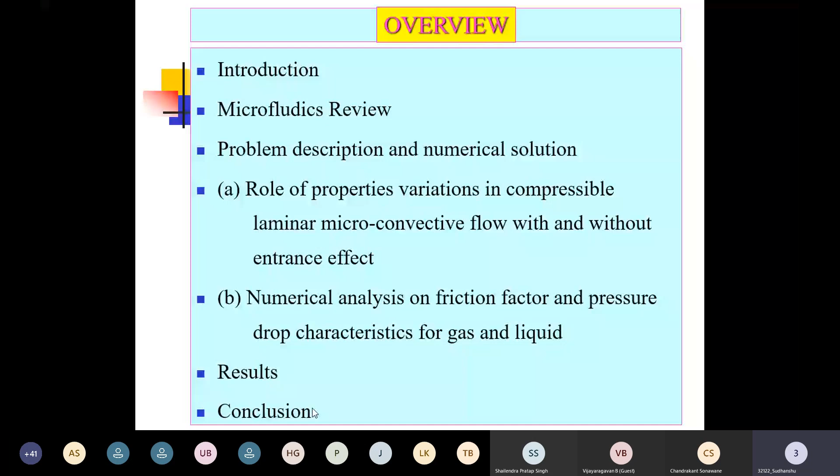And in a complex flow engineering system, when we study the gas turbine, the turbine generator, before designing the shape, size, volume, material, and all the effects of the fluid parameters like conductivity, density, the temperature field, velocity field, you can find them well in advance before you fabricate anything. This is the beauty of CFD software.

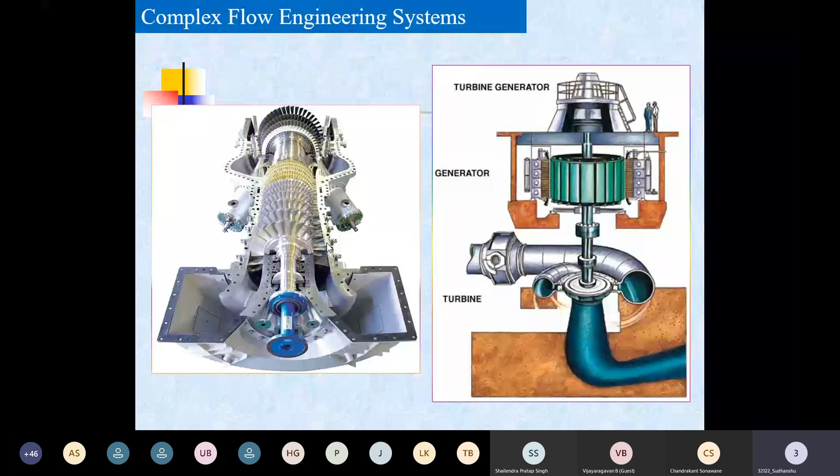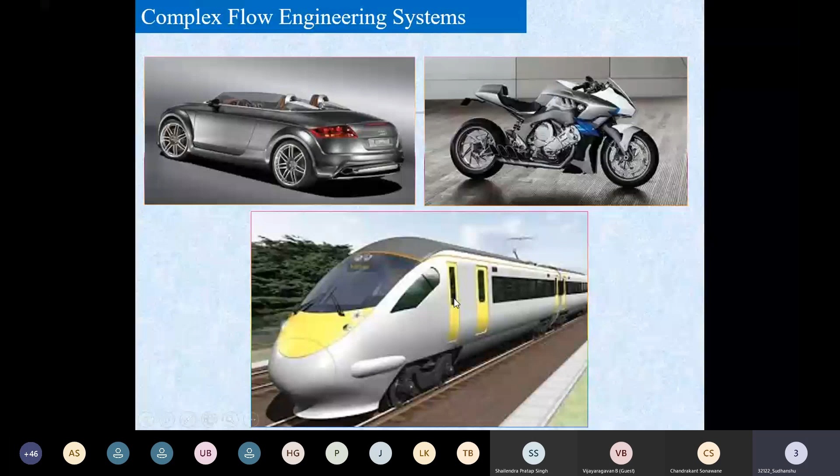So complex flow engineering problems are designing the shape, maybe of a bike, maybe of the bullet train, maybe of this type of vehicle. You can use this type of CFD solution when you go for the complex flow engineering system.

When you construct a bridge, what is the distance between these two pillars, and what should be the height so that the wave energy does not hit this pillar at large, and the boats and ships can go easily without obstructing the current? That also can be seen with the help of this CFD solution. The same is true for the gas turbine and the wind power tower. Such complex flow engineering systems you can handle with the help of this CFD tool.

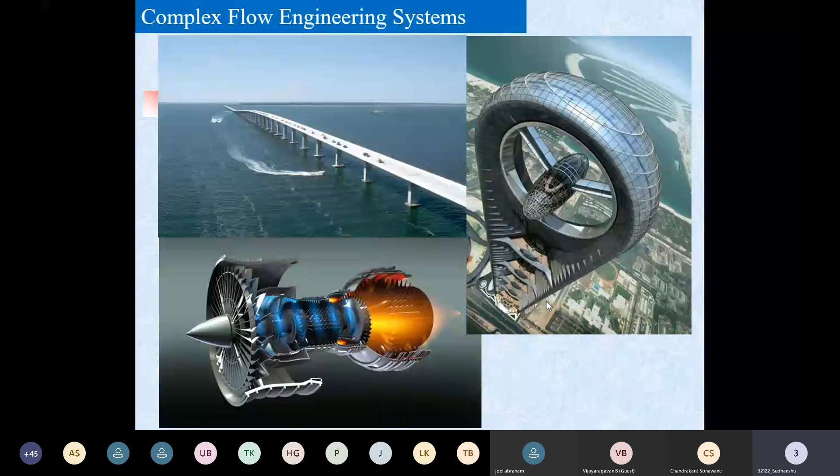So the best example we will see in aerospace. Very first, I will go through the application point of view. I will focus on biomedical applications, aerospace applications, material technology, MEMS technology, electronics applications. After describing all these applications in 5 to 10 minutes, I will specifically focus on the electronics and MEMS device applications where this research area is applicable, how these MEMS devices can be designed, and how microfluidics can be studied. Then we will go in depth.

So let me highlight various applications of CFD. I start with the first application, called aerospace. You can see here when it flies at a very high altitude, it has a drag force. The propulsion takes place with the help of engines located at the ends of the two wings. We have gravity because of the weight of this system and the passengers sitting inside. And of course, the lift is generated with the help of the wing shape, the aerofoil blades.

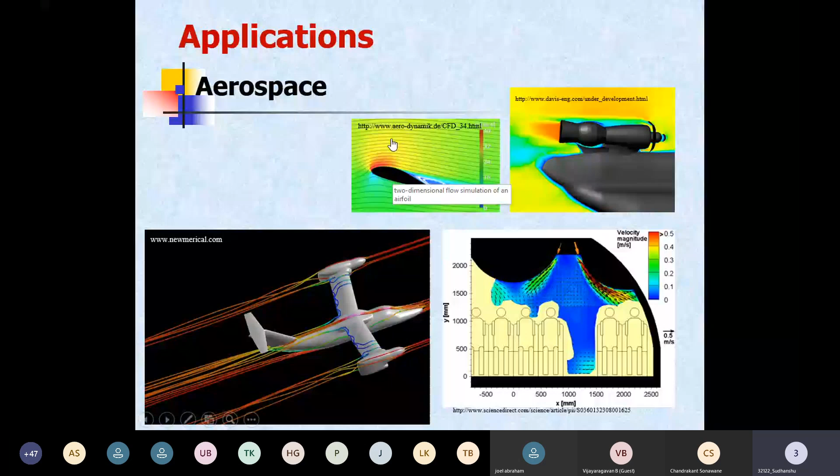So this propulsion study can be done. This aerofoil shape, how the attack angle is designed, can be well studied. And basically, if you see the structure, there are four types of aerodynamic forces. First is thrust, which is the power of the airplane engine, acting in the forward direction.

Second is the drag force. It is the resistance of the air molecules that hit the airplane, and it is a backward force. These two forces are opposite to each other: this opposes and this propels. So of course thrust should be higher than drag. The third force is lift, which is an upward force, and the fourth is weight due to gravity, which acts in the downward direction.

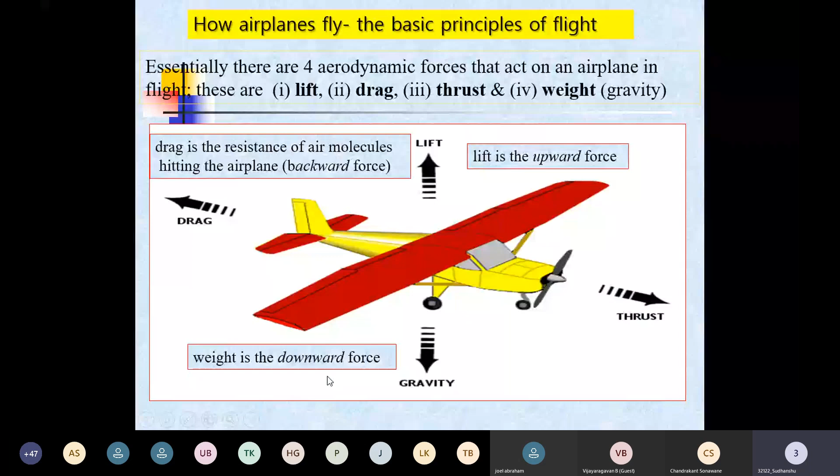So thrust is generated by the airplane engine, propeller or jet. Weight is created by the natural force of gravity acting upon the airplane. Drag comes from friction as the plane moves through air molecules, and lift is generated by the airplane in flight, which is possible with the help of the wings of the airplane.

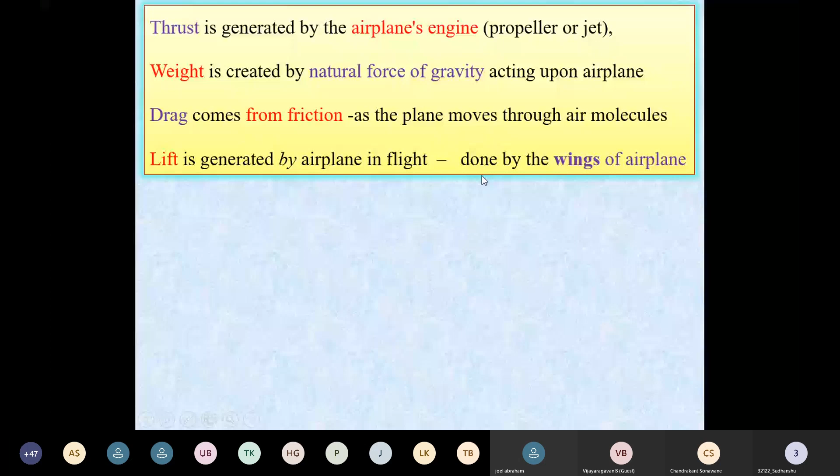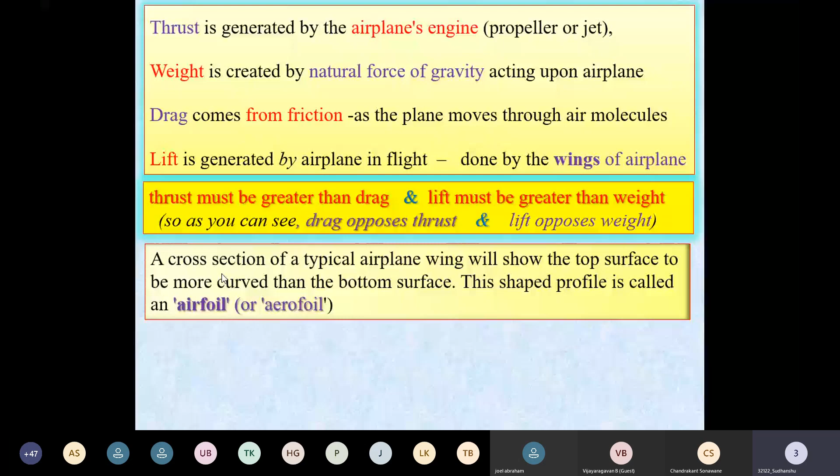So in short, if you do the CFD of all these four forces, what is the quantity, what is the quality, in what proportion they should be, you will find thrust must be greater than drag and lift must be greater than weight. Drag opposes the thrust and lift opposes the weight. So we are only doing our business to lift the entire body, the aeroplane along with the passengers. This is possible with the help of the wings, which have an aerofoil shape. The cross section of a typical airplane wing will show the top surface is more curved than the bottom surface.

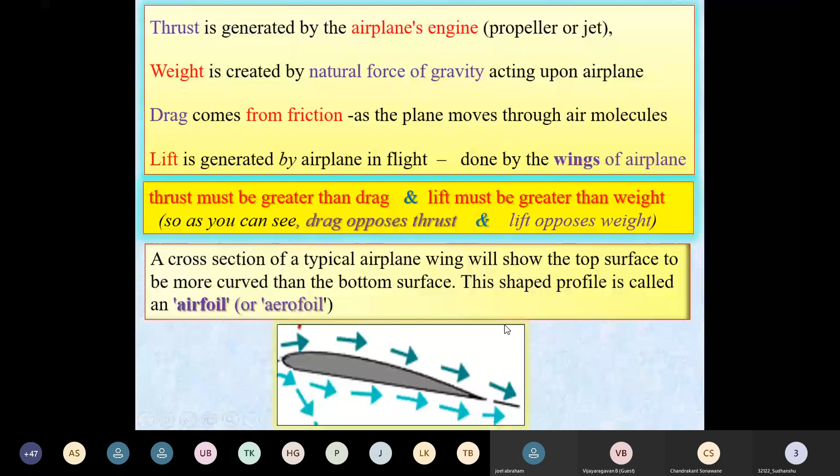Because of this Bernoulli's principle, the molecules flowing over the top surface will move at a higher velocity, meaning the pressure force will be lower compared to this force. So because of creating this pressure difference, higher pressure and lower pressure, this will be lifted up. So this shape of profile is called an aerofoil shape. So this is one of the examples that we can use using this CFD application.

Second is automobile. In automobile, right in the beginning we have seen this entire shape you can design as you want, whether it's a racing car, a passenger car, a truck, or a bus, depending on the load capacity, the speed, and the type of application for which this vehicle is used. So depending on this, we can calculate the drag force and then accordingly we can put the shape. So this is possible to design with the help of this calculation of the drag force using CFD.

So this is the outside part, but if you go to the inside, the passengers sitting inside should feel comfort. So ventilation, air conditioning, that is required, right? So this air conditioner moves interior heat to the outside in the summer months. So how that flow should be, at what rate the cold air should circulate inside the compartment, how the warm air should be exhausted, and how the makeup air quantity should be maintained.

And then if it is cold, you have to start the heater. If it is a heated condition, you have to start the air conditioner. So in order to maintain the comfort temperature of 24, you can design your air conditioning as per your comfort and the area available inside the vehicle. So this is one of the best examples of CFD, where you can study the airflow, the velocity contours and the temperature contours.

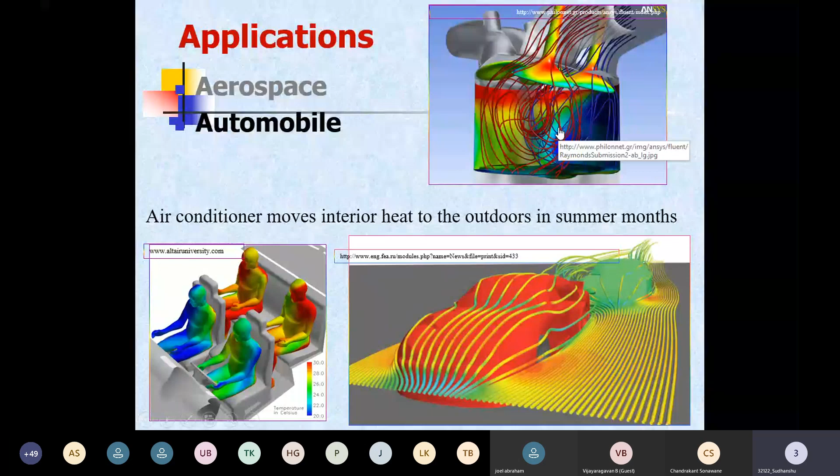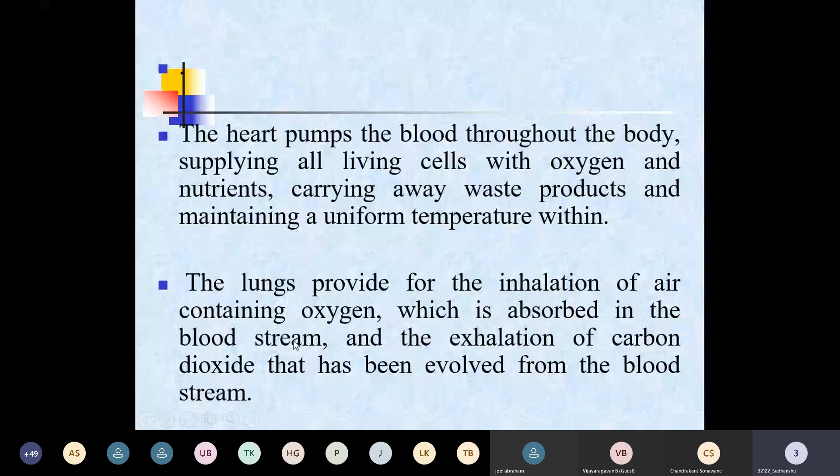So similarly, the lungs provide for the inhalation of air containing oxygen, which is absorbed in the bloodstream, and exhalation of carbon dioxide that has been evolved from the bloodstream. So this is the example in case of biomedical.

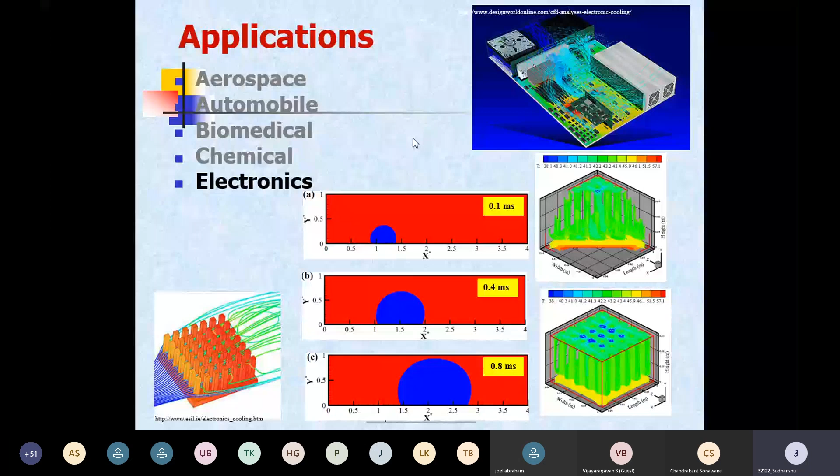So by the way, we can calculate the uniform temperature within the system, and the temperature will not rise to a higher level. So this is one of the best examples for the electronics or MEMS industry, thermal management system. So you can see here, these are the micro channels which are provided. Even a small thread or a needle will not insert.

So the dimension of this micro channel, which is provided on this hotspot in order to provide the cooling effect, so that whatever heat is generated in this silicon substrate will be carried out from one end to the other end. Such small micro channel devices are embedded in the silicon substrate. This example is just kept to show how small the dimensions are. It is below 1 mm, maybe in micrometers.

So this was the first PCB, first experiment operated by Tuckerman and Pease, well-known scientists in this area, in 1981. They tried to cool this PCB of the electronic devices and maintain a uniform temperature of 35 degrees over the surface, and they tried to remove the hot spot. They tried to remove the heat flux from the surfaces, around 790 watt per centimeter square, and it opened the door of microchannel cooling and MEMS design. So this was the first experiment.

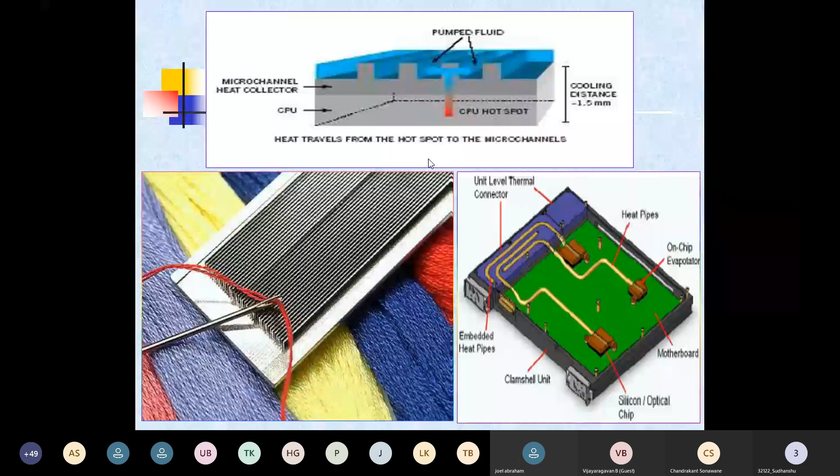The next application is fluid structure interaction. When you construct a high-rise building, either Pune Mahanagarpalika, Bombay Mahanagarpalika, or Thane Mahanagarpalika will ask the architect and construction builders to take a no objection from the high-rise building section, so that the air flowing nearby does not get trapped: what should be the distance between the two buildings, what is the approximate height of the building.

So they will take the vortex shedding and the velocity, at what rate this airflow will strike the building, and then how much quantity of air is available for each of the flats or for each of the floors.

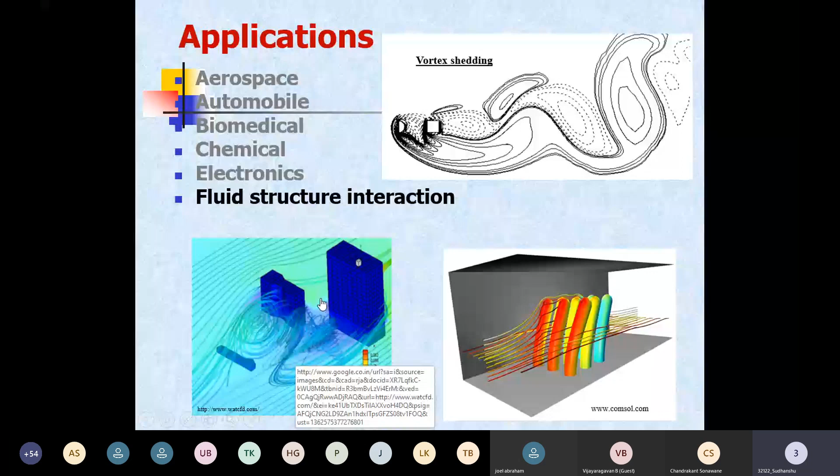Then this is the example in marine, and in power generation, maybe wind, how this airflow takes place and how it gets cut. So because of this movement of the blades, the energy is generated. So this is one of the applications, marine application, power generation application of CFD.

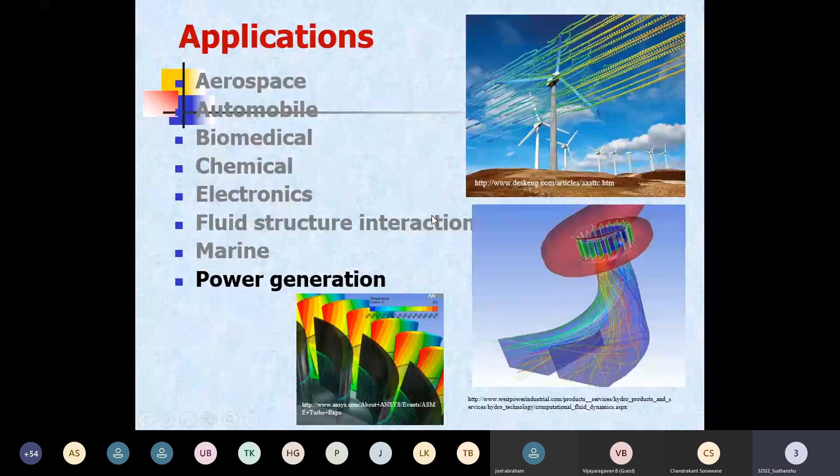In material processing also, we have a number of materials which will carry the heat with the help of their property. It will store the heat. So in this type of application, composites are also widely applicable and are very popular in today's industry.

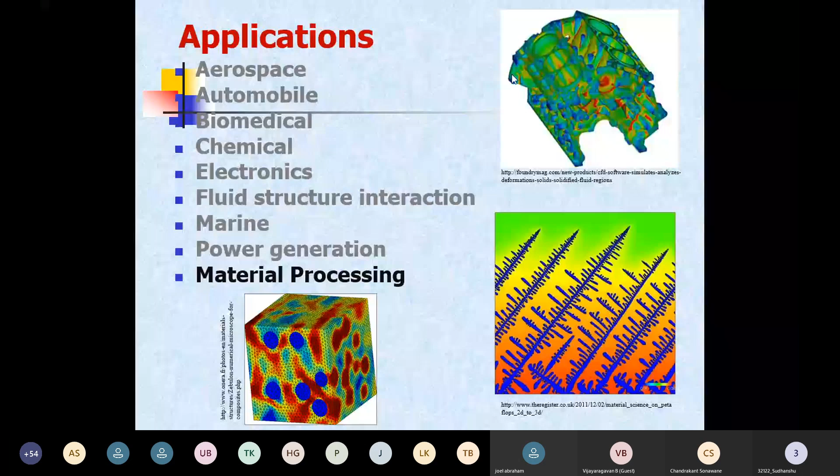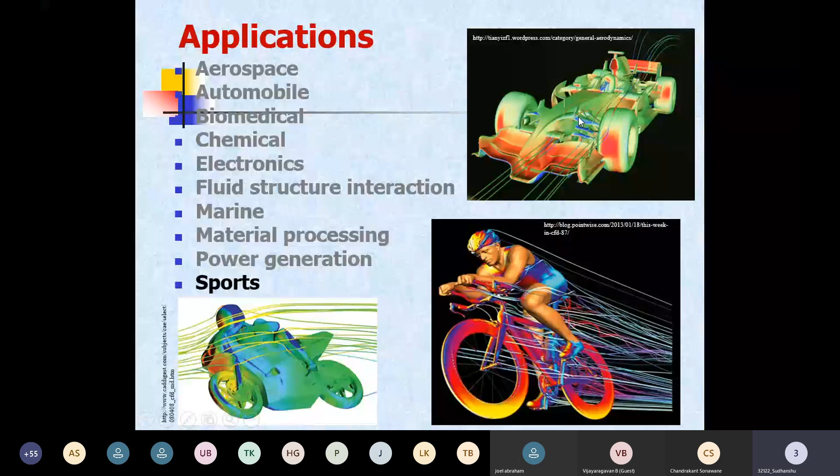With this application, now we will try to move to the microchannel application, MEMS devices or electronics, PCB or motherboard cooling devices, wherein we are trying to use a microchannel called a microtube heat sink. So let us see why this microchannel cooling or microtube heat sinks are required, where it is applicable, how it works, and if this works so fine, then what are the problems?

So of course, there are some advantages: it carries a tremendous amount of heat and it manages the thermal level. Thermal management is good. Then what are the problems? Yes, there are problems because of the high surface area. We have more friction, we have more pressure drop. So how to overcome these hurdles?

So in studying all these systems, how our results deviate in heat transfer characteristics and pressure drop characteristics in the case of a microchannel compared to the conventional channel, that is what the study is. So today electronics and telecommunication industries are marching toward the miniaturization of electronic devices. And because of this miniaturization, there is increasing demand for space efficient, high performance heat dissipation devices.

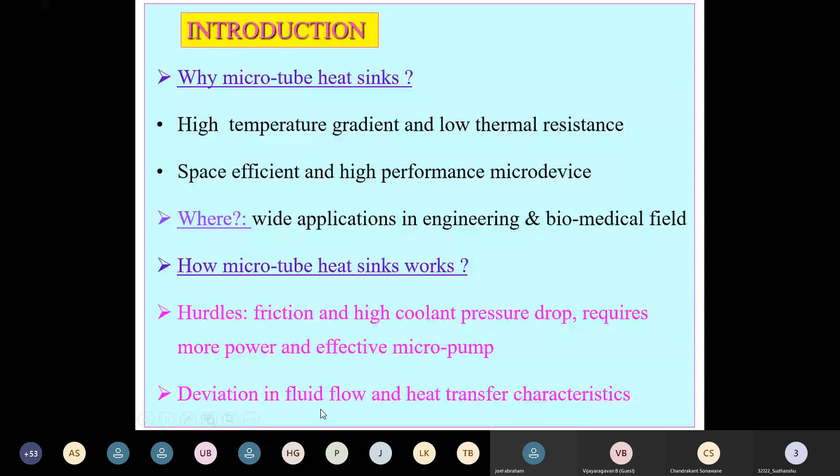So we are trying to study this convective flow through the microchannel when the flow is taking place through the microtube or microchannel. Specifically, the focus is given to increasing the Nusselt number, that is extracting more and more amount of heat to the surrounding, where we are focusing to find what is the Nusselt number. But at the same time, we should not forget that we are losing pressure drop, because of the friction factor, due to more surface area available. So this should be lesser. How this friction factor affects the entire heat transfer characteristics, we should not forget. That is why the second point of thrust is on this friction factor. At the cost of this friction factor, how much rise in the Nusselt number there is, that was the study.

In the past, so many authors, right from 1965 to 2010, studied what is the Nusselt number and the original theory. They tried to design various hydraulic diameters of various dimensions of the microchannel with various cross sections, maybe circular, trapezoidal, rectangular, and they used many types of test fluid, right from air, water, nitrogen, hydrogen. But they found that all these results are deviating from the conventional channel.

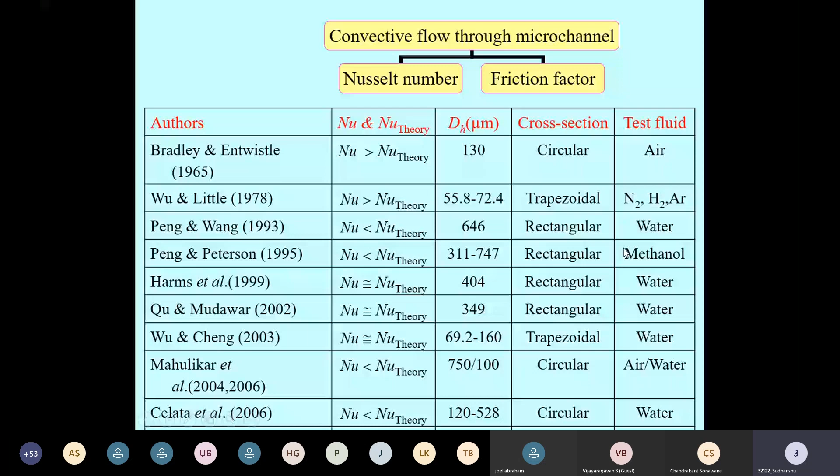Another study was carried out by so many authors, right from 1983 to 2008 till 2020, and they studied what is the friction factor and Reynolds number. They found that in some cases, this friction factor and Reynolds number, the product of these two, equals the available theory in the textbook. Sometimes it's more, sometimes it is less. So why is this so? They tried to carry out experiments using different types of microchannels of various dimensions, of various cross sections, using different types of test fluid, and they found that this is possible. Sometimes it's greater, sometimes it is less, sometimes there is a change in Nusselt number because of the friction factor or pressure drop change. But altogether, they came to know that this is all possible because of the scaling effect. That scaling effect is more dominant at reducing dimensions.

So this scaling effect, in case of gas microconvection, is classified into rarefaction and non-rarefaction. As the dimension of the channel gets reduced, at some point the conventional continuum equation gets breakdown. Why is this so? Because at some point the conventional continuum equations break down. So the rarefaction scaling effect arises because of the failure of this continuum assumption. Because of its failure, we are getting this type of scaling effect, or this breakdown effect. This breakdown or failure of the continuum assumption is characterized by the Knudsen number.

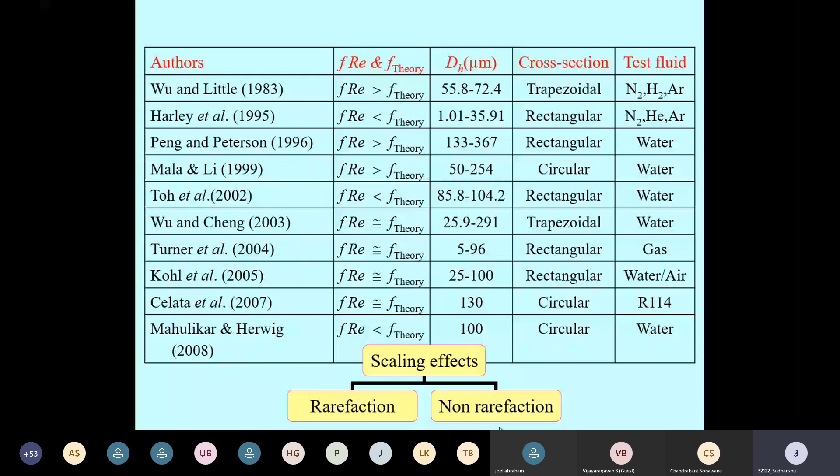Sorry, Knudsen number, let me show you. This is the Knudsen number, Kn. This Knudsen number is defined as the ratio of mean molecular free path and hydraulic diameter, the characteristic dimension. This ratio explains the deviation of fluid from the continuum behavior, that is called the rarefaction effect. When lambda is much smaller than dh, the continuum model is valid.

So you can see here, when lambda is much smaller than dh, we have this Knudsen number in the range of 0.1 to 0.001, we call it a slip flow regime. Still, it is less than that. When Knudsen number tends to 0.0001, we can call it the continuum theory, and ordinary density level we can assume here.

But if this Knudsen number increases from 0.1 and ranges to 10, then it is a transition regime, and if it is more than 10, ranging towards 100, then it is free molecular flow.

So when this Knudsen number tends to 0, we can assume this is a continuum flow without molecular diffusion, and here we can use the Euler equation model. When it is less than 10 to the power minus 3, that is 0.001, we consider this a continuum flow with molecular diffusion. To solve this model, we can use the NS equation, Navier-Stokes equation, but with boundary condition, we use no slip wall boundary conditions.

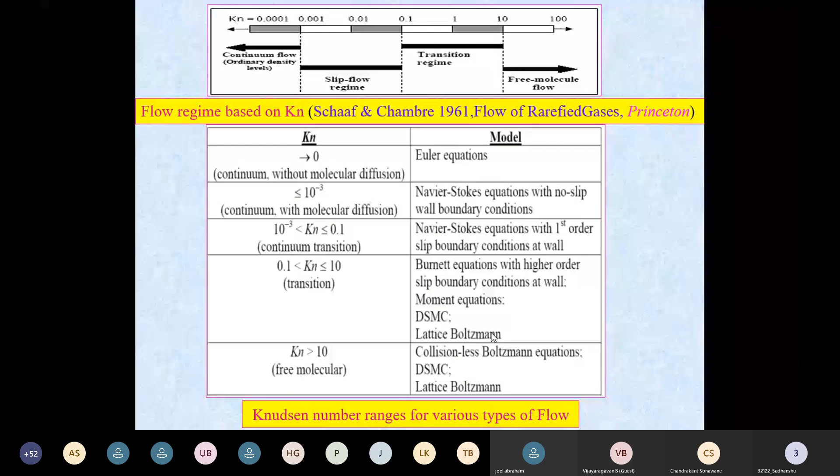So we are trying to focus now on scaling effects. We are narrowing down towards our research, going to the scaling effect. One is rarefaction, one is non-rarefaction. Rarefaction means velocity slip, temperature jump, and non-rarefaction means axial conduction, viscous dissipation, and property variation.

Wherein we are again focusing on one of the more important non-rarefaction scaling effects, property variation, because the temperature gradient in a very small area of the microchannel is very, very high. And because of this high temperature gradient, the property of the fluid is getting varied. So we have to consider this variation in property, and it has a very important role in heat transfer characteristics.

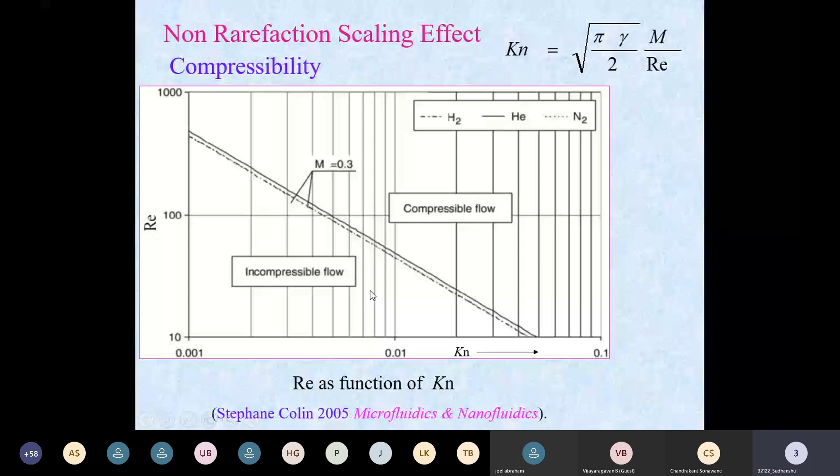What is the meaning of this? In incompressible flow, the Mach number is less than 0.3. Here, whatever density variation occurs due to pressure change, we consider it very small and neglect it. Air density is a property of pressure and temperature - the change in density with respect to pressure, and the change in density with respect to temperature. This is called sensitivity of density due to pressure, or sensitivity of density due to temperature. So S rho P, the sensitivity of density with respect to pressure, we neglect for incompressible fluid, and focus only on the change in density with respect to temperature, del rho by del T. This is the meaning of incompressible fluid.

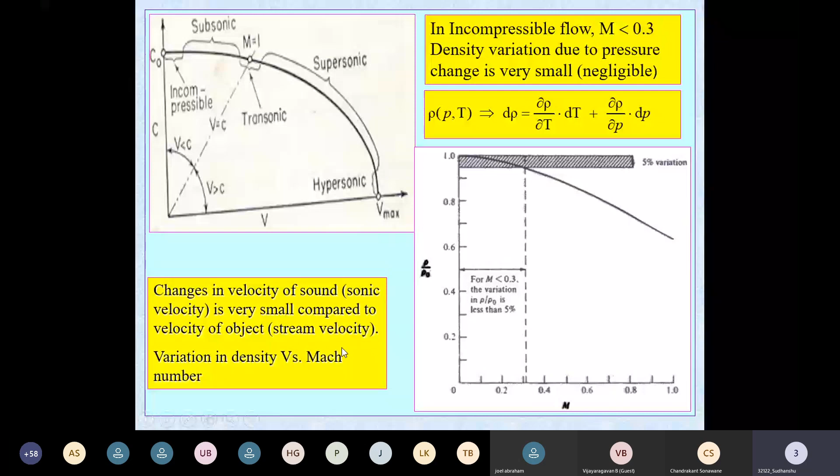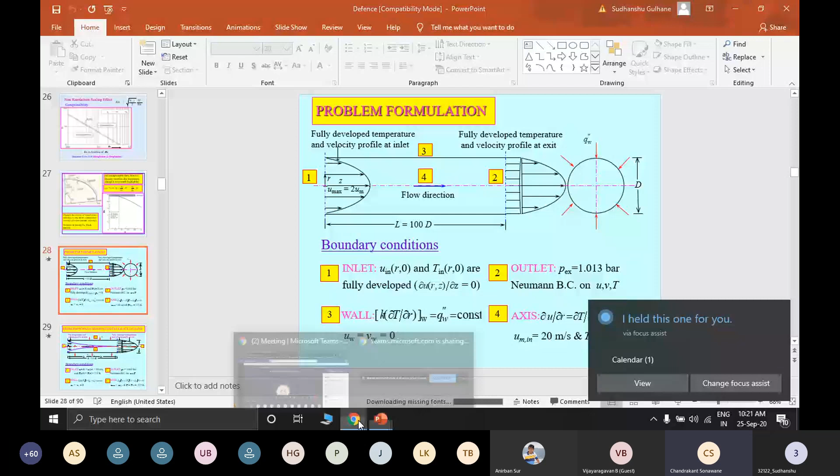Am I audible, sir? Chandrakant sir, am I audible? Yes, sir. Okay, so no disturbances from my side, any audio disturbances? No, absolutely. Going smooth, sir. Okay. So these are the three types of boundary condition we talked about so far. Yeah, now it's okay. You just mute the mic from your end. Somebody's mic is on. Sir, I am muting all, so you can unmute yourself. Yeah, you can unmute now. Yes, sir. Okay. I assume that you all are audible. Yes, sir, talk on.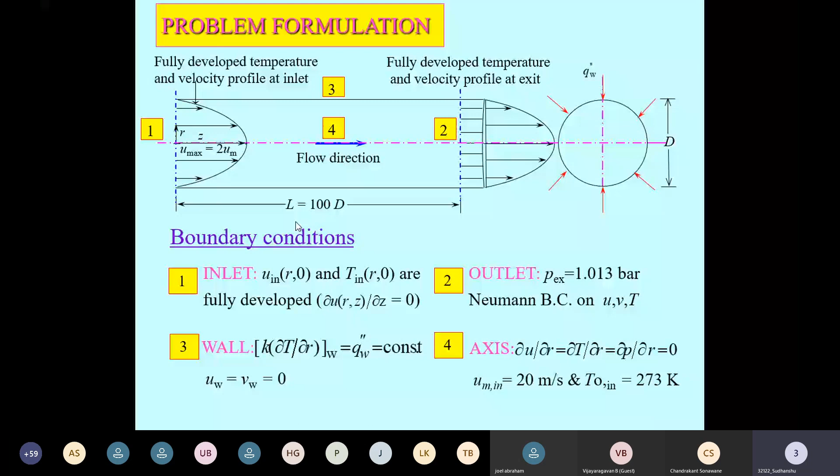So this is case one. It is applicable for air, for gas or liquid. But now if you talk about the entrance length, this problem formulation will be somewhat different. How is it different? You can see here. You cannot have a fully developed profile here. You have to have a flat profile, that is, a flat temperature or flat velocity profile at inlet with some constant value. All these are uniform or flat with some constant value.

When it enters, because of viscosity, the last particle will try to stick here, and then a boundary layer will form, and the boundary layers from both sides of the wall will coincide at this point at a certain length, and here the flow will get accelerated at the maximum rate, and the velocity will be double compared to the mean velocity. Here we get a fully developed profile. So this is called the entrance length, right? And we are trying to provide a uniform heat flux over this length, and that is why this profile is getting developed, both the temperature profile and the velocity profile.

So here the boundary conditions will be the same: outlet boundary condition, wall boundary condition, and axis boundary condition. Only the inlet boundary condition will differ. In the previous case, it was a fully developed profile. Here, the variation of u in radial direction at x equals 0 will be equal to the flat profile. You can see here u in radial direction has some constant value, which was not true in the earlier case.

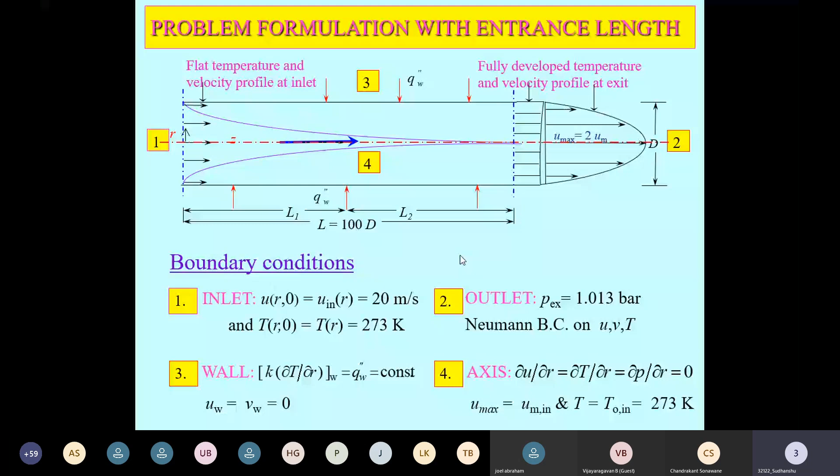There we have to write a code in C++, wherein we have to write the complete velocity profile. But here we simply put a constant value, so that it will automatically fully develop at an entrance length. So this is the difference between the fully developed profile and the entrance length profile. The other three conditions are the same; there is no difference in those. So this is the difference in these two problems.

Okay, now we are trying to solve these problems with the help of numerical simulation. So let me focus on how this problem is solved with numerical simulation. Here we consider aspect ratio L by D of 100, which is subjected to a constant wall heat flux boundary condition.

That heat flux boundary condition is given as 5, sometimes 6, sometimes 7 watt per centimeter square, and a very small diameter, that is 750 micron meter diameter of the microchannel, is taken in order to examine the effect of high temperature gradient and its effects on the microconvection characteristics.

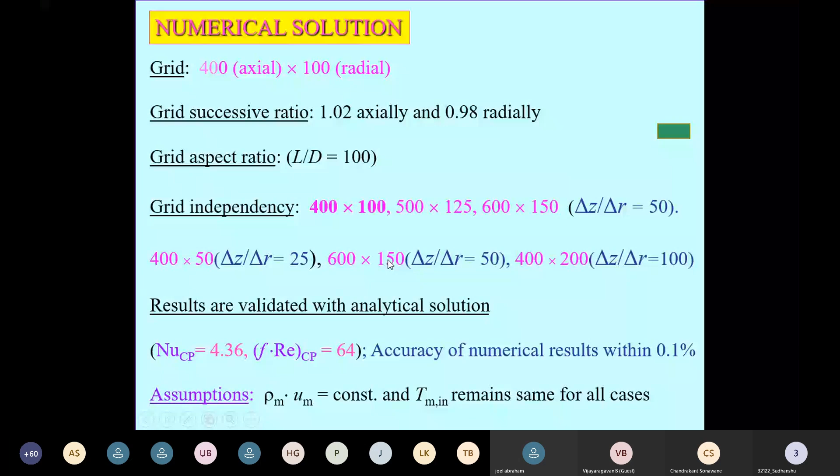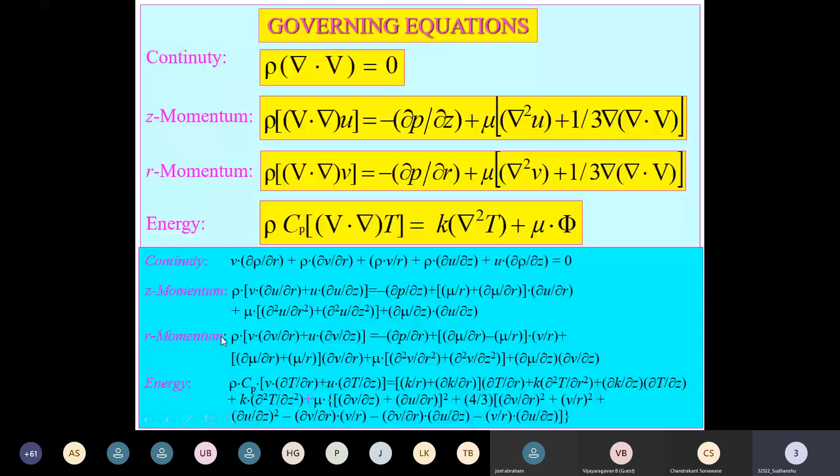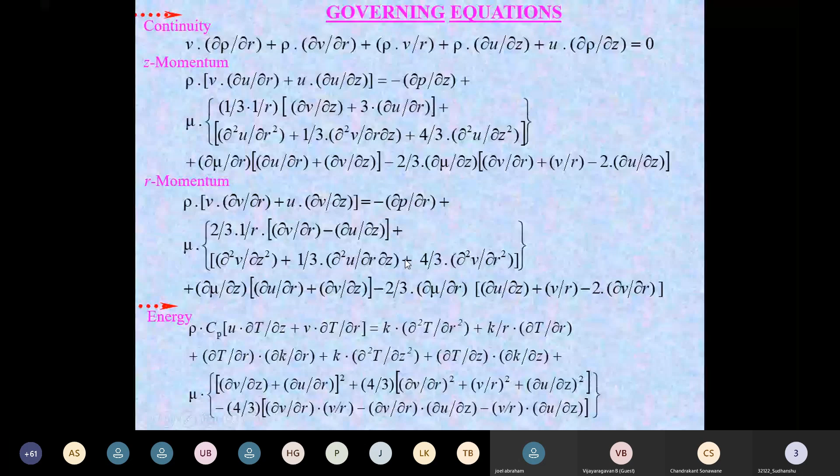So we solved for the property variation one by one, continuity, momentum, and the energy, wherein we have tried to introduce the new factor called viscous dissipation, and somewhere in the investigation, this viscous dissipation is introduced. Similarly, here axial conduction is also introduced. So when we non-dimensionalize these equations, we have considered average quantities like UM and TM. So how are UM and TM calculated? This is shown here, and this is the gradient of V, how it is calculated, how to define this theta and pressure. So we have non-dimensionalized all these parameters Cp, K, mu, rho, Z, and U.

Suppose this u, it is non-dimensionalized into U bar, and it is written as a ratio of u to u m. So it is non-dimensionalized by mean velocity um. So we have found three non-dimensional pi groups. This is a pi group called the sensitivity of the density with respect to temperature at the inlet profile, which is given by this parameter. This is a pi group of sensitivity of the viscosity at inlet, and this is a pi group sensitivity of the conductivity at the inlet, which is given by this group. So we have non-dimensionalized using these parameters into pi groups for density, viscosity, and conductivity.

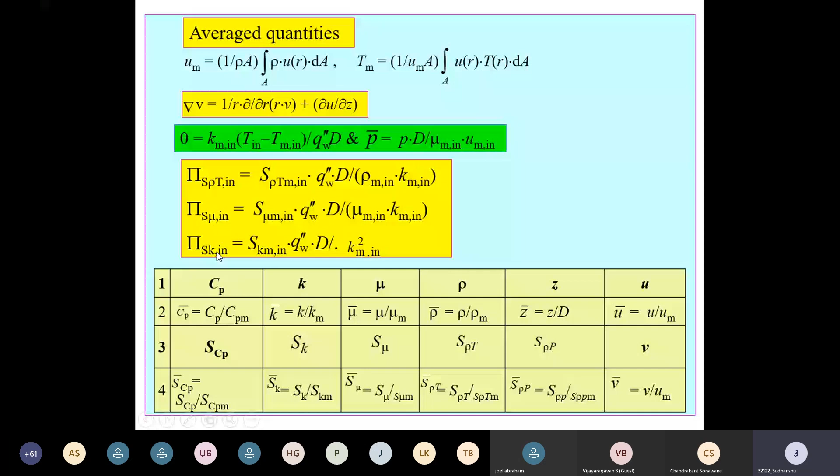So in order to find this, we have to solve these equations. What are these axial conduction terms and radial convection terms? These radial convection terms can be found out with the help of this continuity equation, and this axial conduction parameter we can study with the help of this energy equation. When you turn on heat flux, the temperature profile will be generated, that will directly affect heat transfer characteristics, and then you can find this axial conduction term in this microchannel.

And this is the energy equation written in cylindrical coordinates, because we are trying to study in cylindrical coordinates. You can see how it reduces to this, and with property variation, how to write this energy equation in this form. So all this will be taken care of by the numerical simulation.

But at the back end, we should not forget what governing equations we are using and how they play a role. Because to do the physical investigation, you must know which terms and quantities play an important role in the governing equation. Otherwise, if you just click, it will provide you a beautiful, colorful picture, but you will not be in a position to write the physical investigation in a proper way, and that's what the real investigation is.

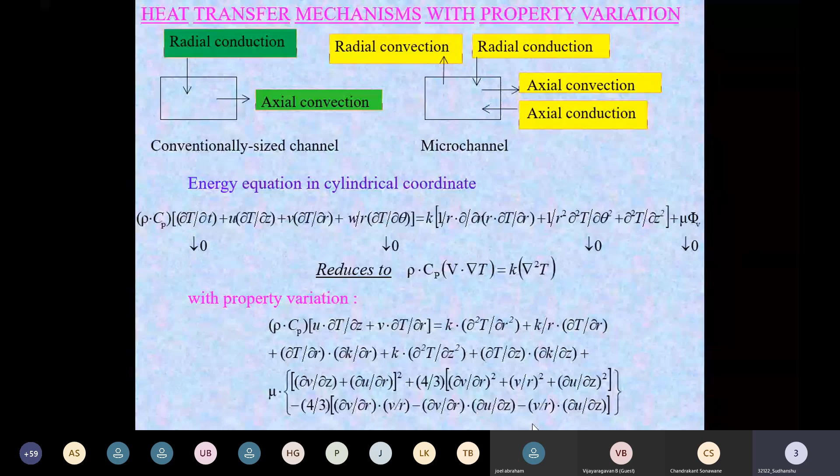So this is obtained by the least square method in this temperature range, and the variation of K and variation of viscosity is modeled with the help of this correlation, which is given in the standard textbook. So as temperature increases, this value increases, and you can capture the conductivity variation in the numerical simulation. A program code is written and it is fitted into the Fluent simulation. So unless you write this code for K variation, mu variation, the Cp polynomial fit and density, you cannot find the exact property variation result.

Now we are trying to focus on the effect.

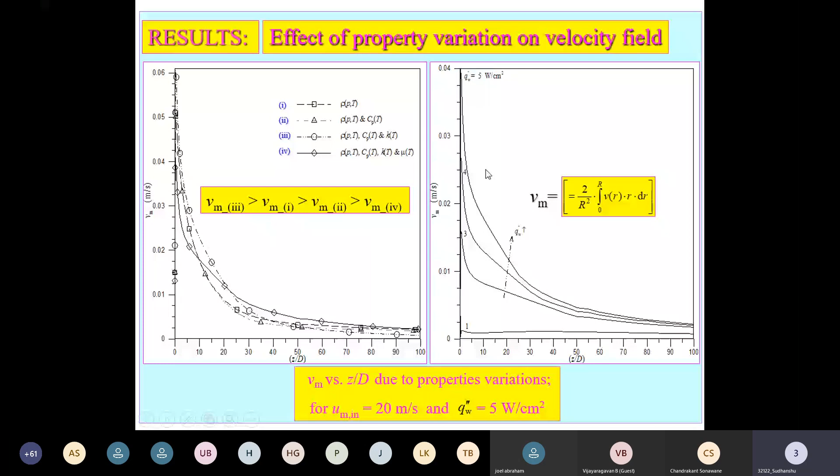Now this is the effect of this radial convection. Now let us talk about the effect on the velocity profile. Velocity profile. This figure will provide the fully developed constant property flow velocity profile due to incorporation of the density variation. If you have a density variation, simple density variation.

See, the beauty of the software which we developed is that we can individually study the effect of each and every parameter. We can study the effect of simply density variation. We can add whatever we want. We can add CP, we can add K, we can add mu, we can add everything and study. So the individual effect can be studied. This is not possible when you go for experimentation. So that is why once it was validated, we went on to experimentation and then started designing the microfluid devices.

Because of this density variation, development of the profile will take place, and there is a flattening of the profile. And because the profile is more flattened at the wall, more mass flux is carried at the wall, and therefore the Nusselt number increases. It means that when density variation is incorporated in any type of fluid, because of this flattening profile, more mass flux flows near the wall, and more mass flux means more convection. So that is called the flattening profile. So it changes from parabolic, that is developed, to undeveloped mode.

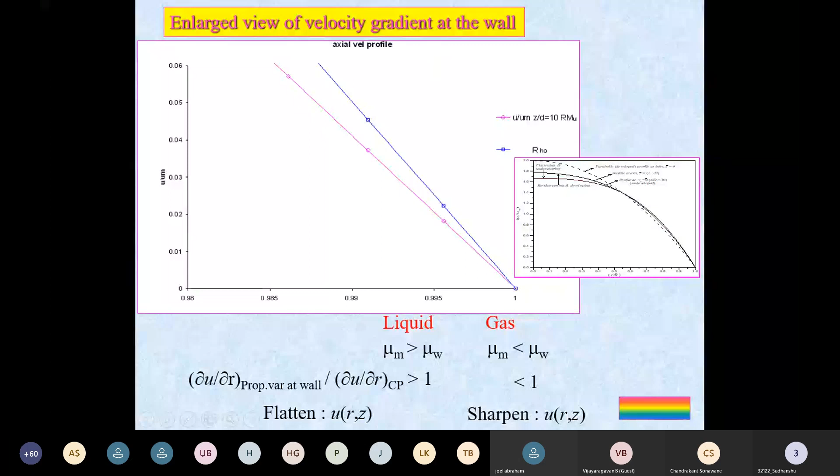Now let us see what is the effect of introduction of this Cp with respect to temperature on the temperature field. Earlier effect was on the velocity field, and this will affect the temperature field. So velocity field is an indirect effect and temperature field is a direct effect, because this will directly change the temperature profile and the Nusselt number.

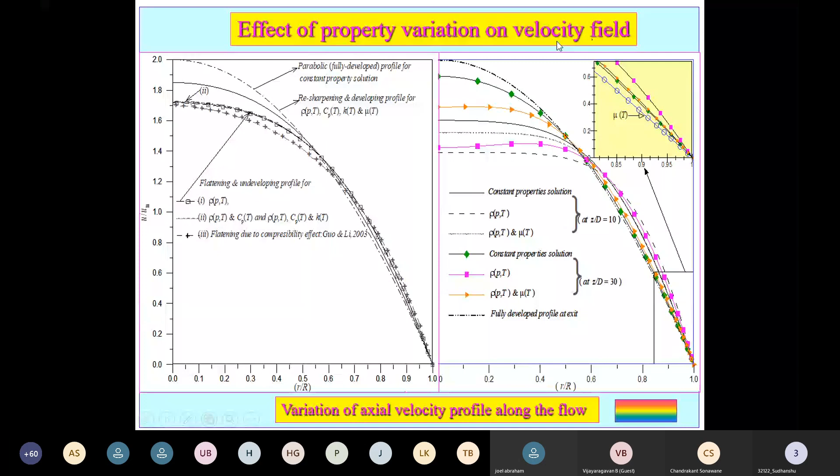This already we have seen. If this temperature difference Tw minus Tm is constant, this will remain constant because diameter is constant, heat flux is constant, conductivity is constant. Only we have to check the difference in Tw and Tm, and you can find there is a decrease in the value of Tm and Tw because of reducing the wall temperature gradient. So because of introduction of Cp, the value is tending to reduce. In case of bulk mean temperature also, the value is changing, getting reduced, and therefore the difference is getting reduced. Because of introduction of the Cp value, there is a variation of Cp with respect to temperature along the length of microchannel due to the heat flux. This Nusselt number will go on increasing because of this reducing value of Tw minus Tm.

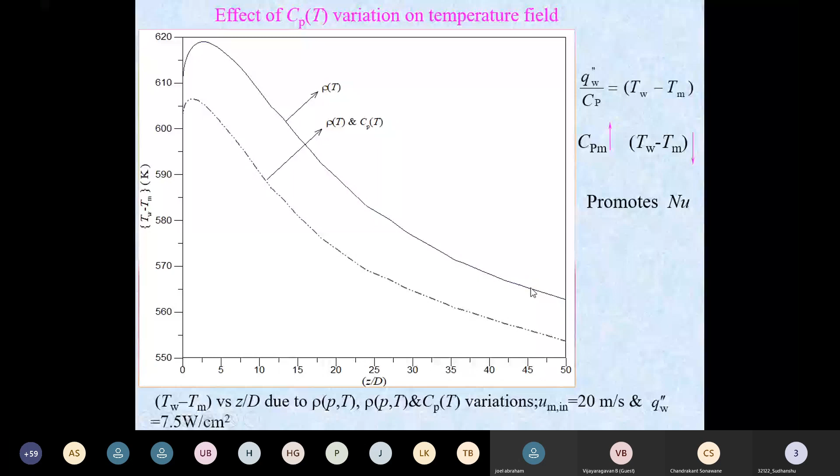Similarly, if you try to see the density effect, if temperature goes on increasing, density gradient reduces, and because of this reducing density gradient, you will find an inverted U type of profile, and this inverted U type profile is less effective. Because of this reducing density, mass flux will reduce. If density reduces, then rho m into Um reduces, and this has another effect on the Nusselt number. Here Nusselt number will try to reduce.

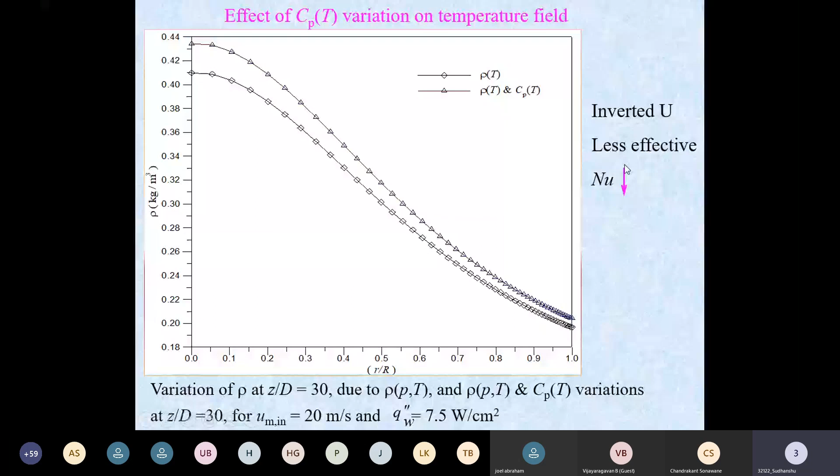So this is the combination of all type of property variation where we are trying to equate the result with the constant property variation. Constant property variation is shown by dotted line, this is for constant wall temperature, and dotted means for bulk mean temperature. And now for rho, Cp, rho Cp K, and for all type of property variation, this Tw and Tm are recorded, and the temperature difference between Tw and Tm is also recorded.

This is constant for constant property, wherein in all the other cases the Tw minus Tm value is going to reduce. In case of rho Cp, the difference is very small, but if you add K and viscosity, the difference is too large, and that is why Nusselt number is very high. Tm is calculated with the help of this profile, and Q double prime W is introduced because of Fourier's law of heat conduction at wall, del T by del R. This shows that the increased value of Cpm reduces Tw minus Tm. If you add Cp here, you can find there is a decrease in Tw minus Tm.

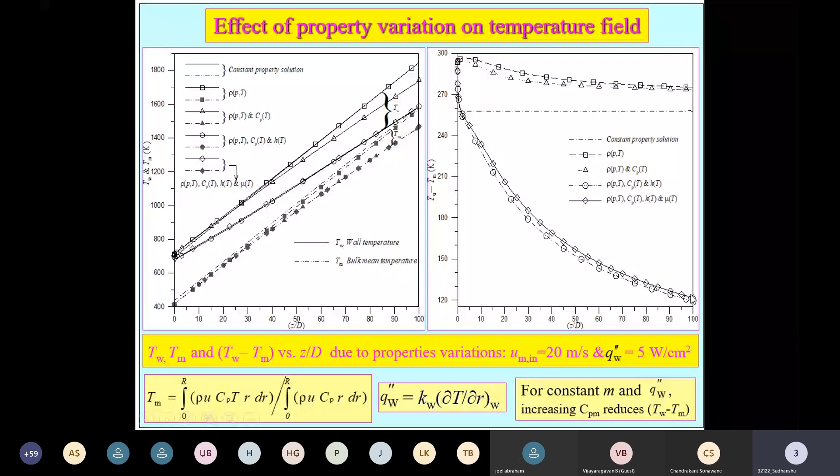So there are some property variation effects on the temperature field. This is the rho variation. Density will go on decreasing and it is reducing at the wall, because at wall there is a high heat flux, because peripheral heat flux is present at the wall, and thereby r by R equal to 1 at the wall will be having the lowest density compared to the center density. For different types of variation, this will vary.

So static temperature will go on increasing. This is altogether different. The density will go on reducing because temperature increases. Temperature is highest at the wall because of high heat flux, so temperature is highest starting from the central distance. It goes on increasing, and you can find the highest value is in case of rho, Cp, K, and mu.

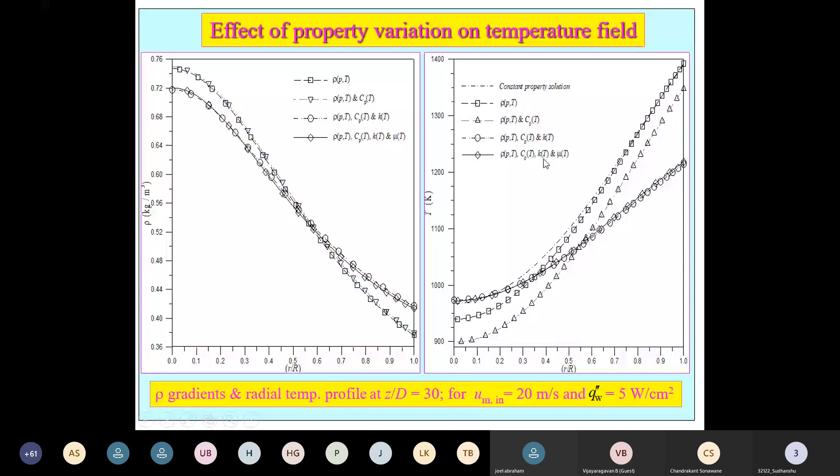One more parameter we should not forget to describe is axial conduction, and this axial conduction is calculated by the enthalpy balance equation. Why go through axial conduction? Because we are trying to find the axial temperature gradient and conduction number along the flow. If I try to jump directly to this slide without explanation of the axial conduction phenomena, it will not be justice. So let me define what axial conduction is.

Axial conduction happens in micro channels because the size of the channel is very, very small, and this effect, called the scaling effect or non-rarefaction effect, we cannot ignore, and that is why it plays a very important role in the design of MEMS devices.

Here you can see a very small elemental area of distance del Z is considered, wherein this peripheral heat is considered as Q double prime W. The enthalpy balance equation is written, and for Cp and K variation, this enthalpy balance equation is reduced to this. For Cp variation along the axial direction, del square Tm by del Z square, we cannot equate to 0 because it has got some value, because of Cp variation we have seen a change in temperature gradient and a change in density gradient.

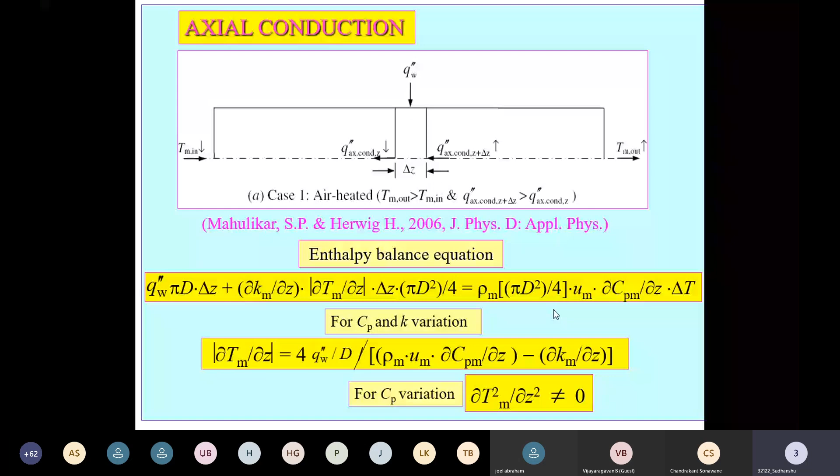So what it indicates is that, because of this enthalpy balance equation, we can find the rate of H increase is faster than the rate of Km increase. And the role of Cp variation in radial conduction is more.

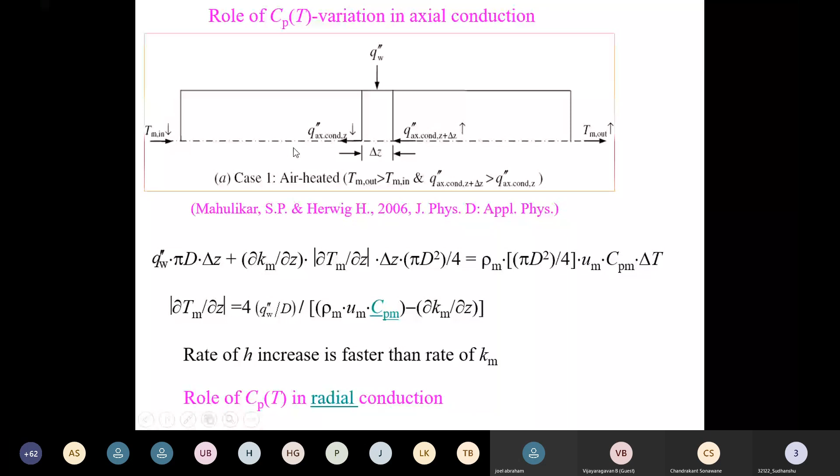So what is this radial conduction? Radial conduction means, if you see the mean bulk temperature variation, R by R equals 1 means at the wall. For this variation of rho, Cp and K, you can see an almost flat profile. But there is a U-shaped profile if you introduce rho and Cp variation. But all of a sudden, if you try to add K variation, it will become flat.

One more additional term is the K variation, and this is the effect of axial conduction, which will try to reduce the Nusselt number because it flows in the opposite direction to the flow. So this Nusselt number in this case is calculated with the help of conduction, and this is the average conduction.

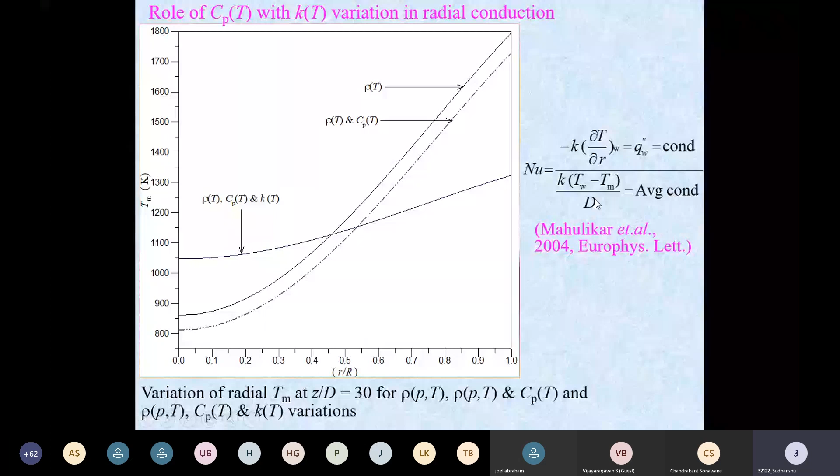So altogether, what we are focusing on is change in Nusselt number. What is the effect on the Nusselt number? Everywhere when you try to incorporate the variation in the property, there is an increase in the Nusselt number as compared to the constant property variation.

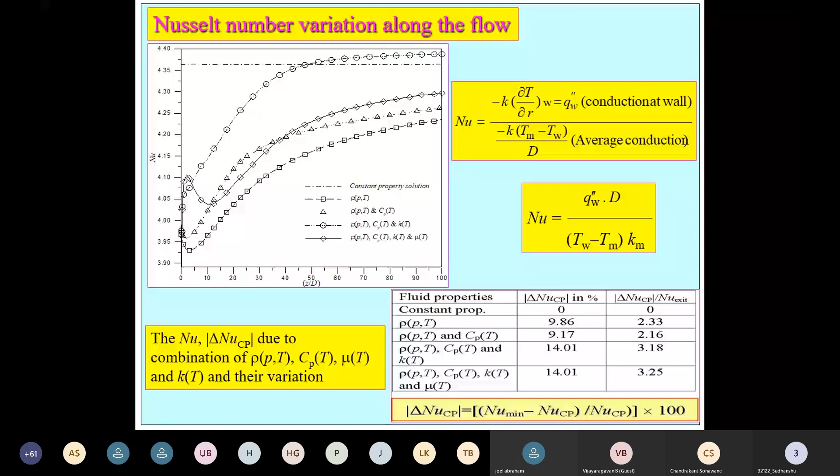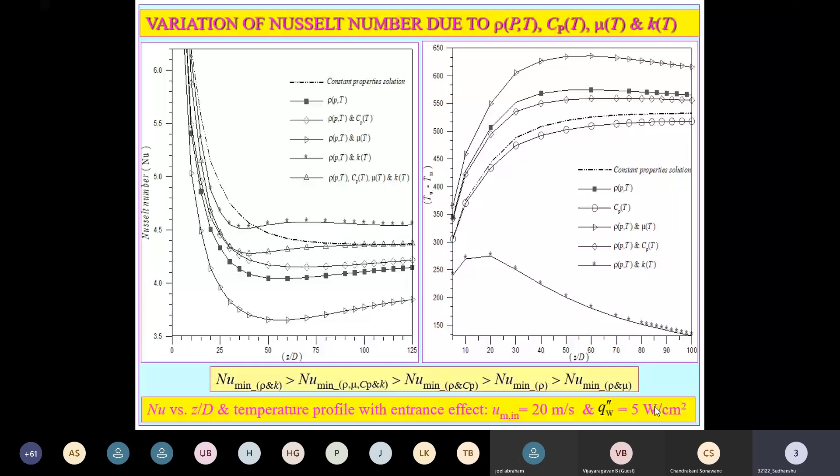Sir, Chandrakant sir? Yes sir. I have tried to cover up the Nusselt number result. The time is over. I have to say something on friction factor and pressure drop characteristics, and 2 to 3 minutes on the Graetz problem, and then I will summarize. Is it okay? Your time is over. Absolutely okay, sir. Absolutely okay, sir. Okay sir, take your time. No problem. Okay sir.

Apart from these heat transfer characteristics, we should not forget that because of the more surface available, we have a hurdle of friction factor and pressure drop. So we have tried to focus on how to calculate this friction factor and the pressure drop.

This is the flow taking place because of this pressure gradient in the downstream direction, and this is the maximum shear stress we obtain at the wall surface, tau w, in the opposite direction, and there is a minimum shear stress at the center because of the acceleration of the flow particles.

So here we try to study two types of friction factor: one is Fanning friction factor and another is Darcy friction factor. Darcy friction factor is always calculated based on the pressure gradient, and Fanning friction factor is calculated based on the wall velocity gradient. This is a ratio of shear stress, tau w, upon dynamic pressure, given by this formula, and Darcy friction factor is given by this formula.

The validation is done in this case also, because unless we validate our model, we cannot go ahead for the property variation. For constant property, what we found is this FD, Darcy friction factor, is 4 times of Fanning friction factor, as written in the textbook. And when we try to multiply this FD into Reynolds number, that product we found was 64. In numerical simulation, we already introduced that the variation in the result was not more than 0.1%.

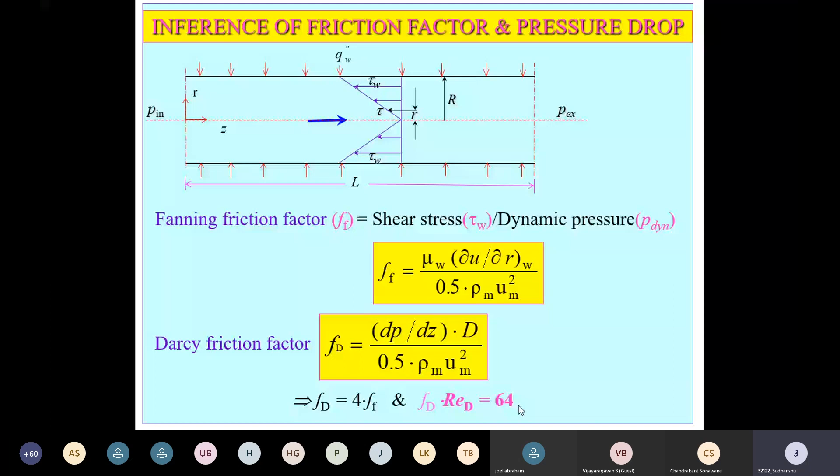So it was validated. With these basic fundamental formulas and understanding, we tried to infer what is the variation of the velocity field along the flow.

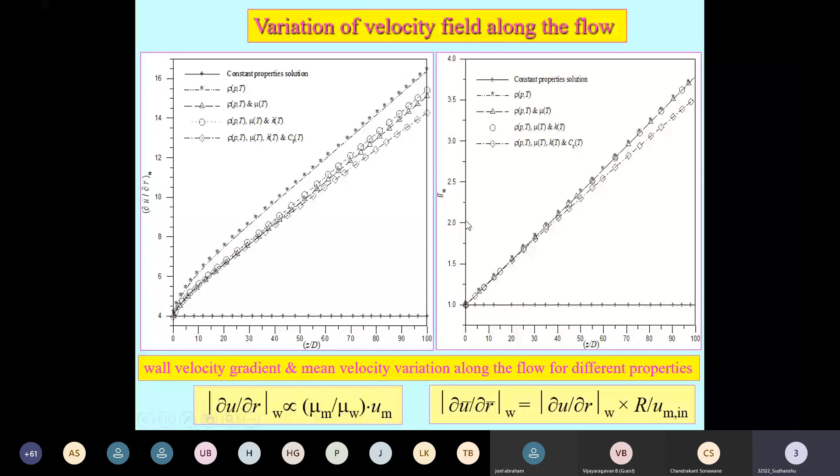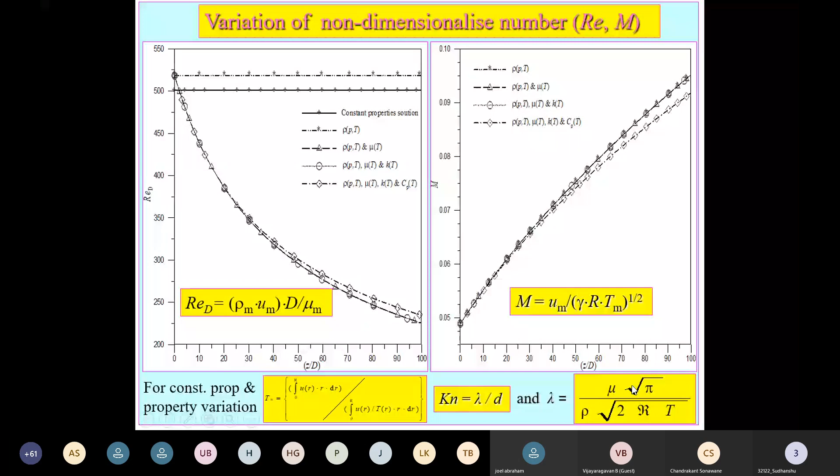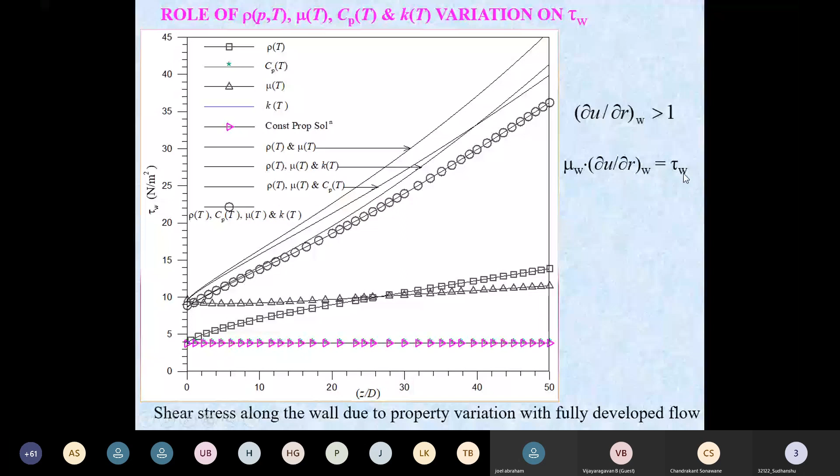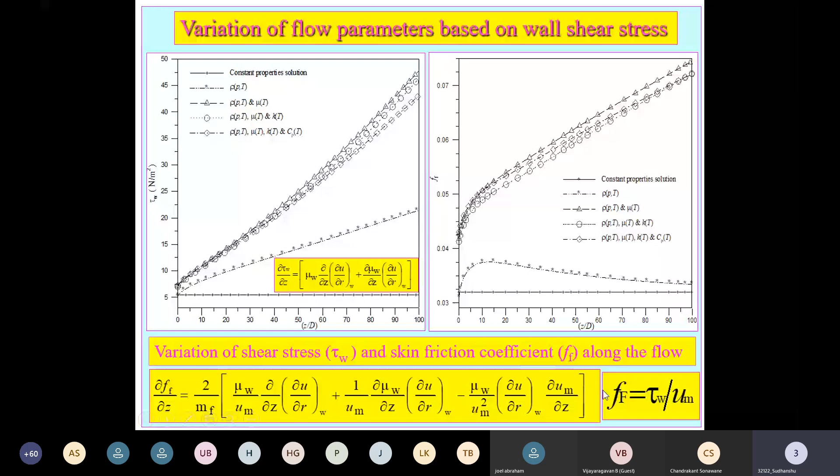So this del F by del Z is to be calculated using this mathematical expression, and we have to write the code and incorporate the change in viscosity with respect to temperature. Then it will provide the proper result. So this FF is calculated with the help of this formula, tau W upon u m.

And the last is pressure drop in the microchannel. Because of this P1, P2 pressure difference along the length, we have this flow in the downstream direction. This delta P means P1 minus P2, the pressure drop along the length L. This net pressure force is equal to the boundary resistance. So we can write this equation of pressure difference and the Darcy-Weisbach equation, and at the last we get delta P upon rho G is equal to 4 tau W L by rho G D, or tau W you can also get by this.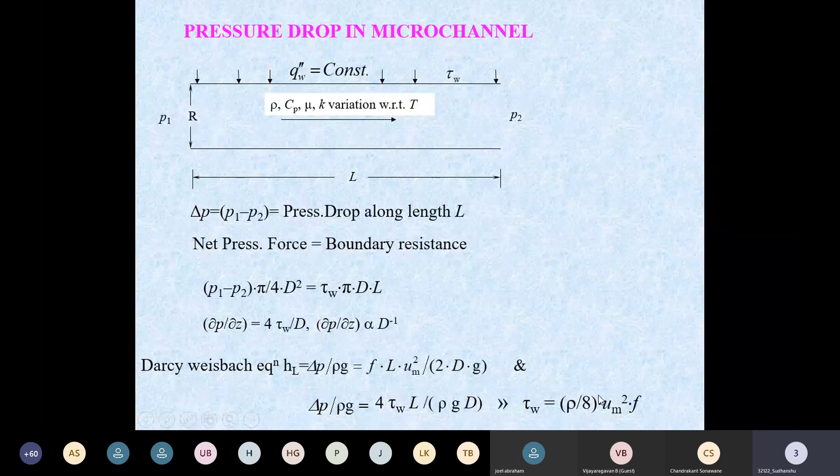So components of the delta P in case of liquid and in case of gas: as we explained earlier, the profile del U by del R at wall is greater than 1, and therefore the velocity profile will get flattened, whereas in case of gas, the velocity gradient at wall is less than 1, therefore the velocity profile will get sharpened.

Sharpening of the velocity profile will decrease the Nusselt number and decrease the heat transfer, whereas flattening means more heat flux at the wall; it will increase the Nusselt number and the heat transfer rate from the silicon substrate micro devices. So decrease in viscosity at wall along the flow flattens the profile, with increase in tau W and delta P. So this increase in mu W along the flow increases the shear stress and the delta P.

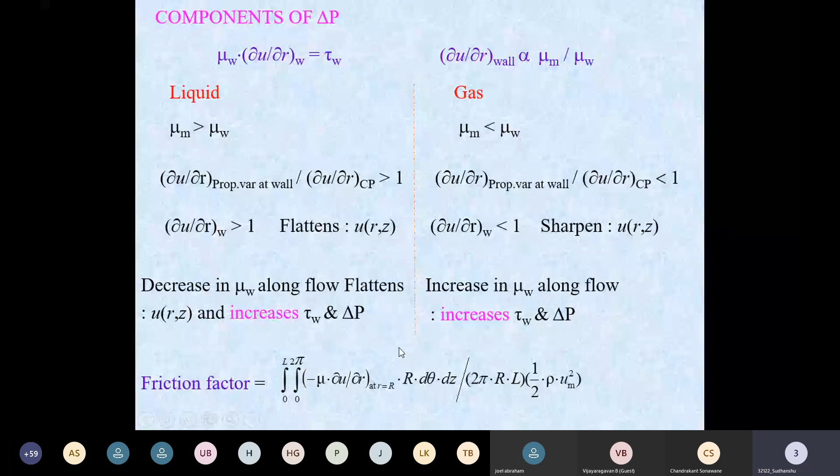And along with this delta P, we have the friction factor, which we calculate with the help of this equation. So this is the delta P. You can see at the end, the exit pressure we have considered 0, the gauge pressure. Since it's atmospheric, the gauge pressure will be 0. But because of this pressure, the flow is taking place and the fluid is coming out. The heat is convected radially outward.

Okay, so this is the pressure difference in case of this property variation. You can see for constant property, the pressure drop is very minimum, but when you add property variation, the pressure drop is maximum.

So this delta P gauge is calculated by the mean pressure in Z direction minus P ex at L, meaning at the maximum length of the microchannel. So we have this P gauge and we have delta P momentum. This momentum is the acceleration of the fluid particle because of this increase in the temperature and reducing density gradient. So this can be calculated with the help of rho m into um, in bracket this difference of velocity.

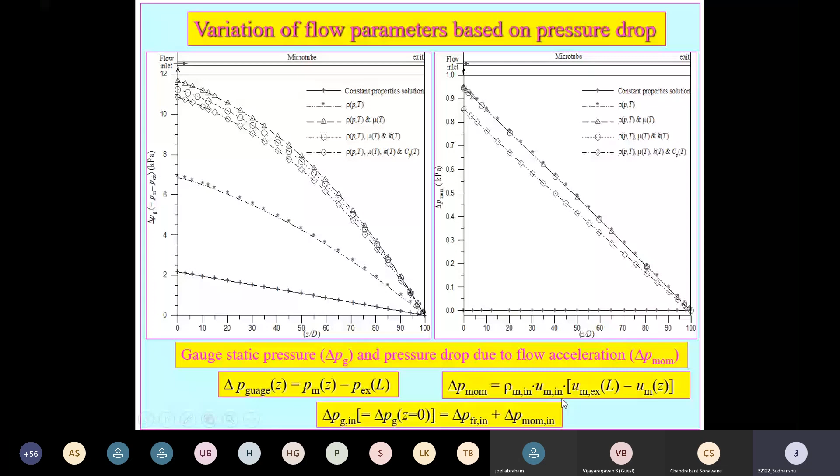So this is the pressure loss due to fluid friction. We were talking about delta P because of momentum. We also have delta P because of the pressure loss due to fluid friction, that is delta P by friction. Delta P by momentum, delta P by friction. And because of these two, we are getting total pressure drop, that is called the delta P total variation.

And delta P total variation is given here: it is delta P friction, and here it is delta P total momentum equation. And at the last, we have friction factor and Poiseuille number variation, where Poiseuille number is equal to the friction factor and Reynolds number product. And you can see dpm by dz, the mean pressure variation in axial direction, is given by the summation of the friction factor variation plus pressure change because of momentum. The summation of these two gives the total pressure variation along the axial direction.

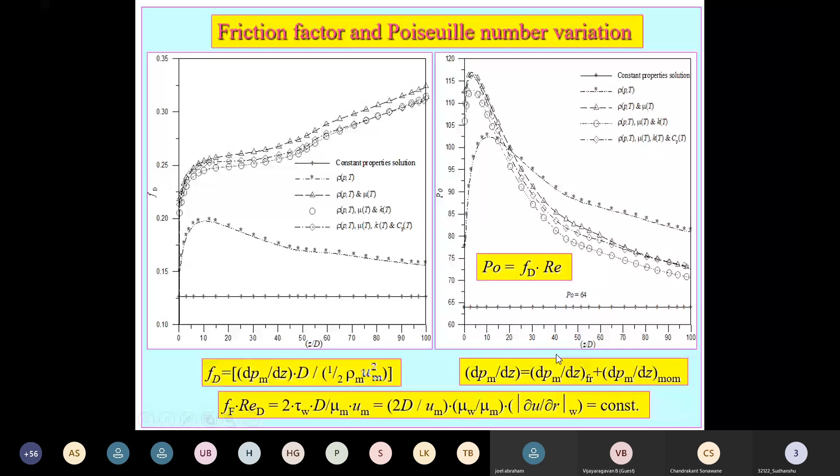So this is the numerical value, the exact effect of density plus other parameters. This is compared with the constant property variation. You can see there is an abrupt change and the maximum change is around 14%.

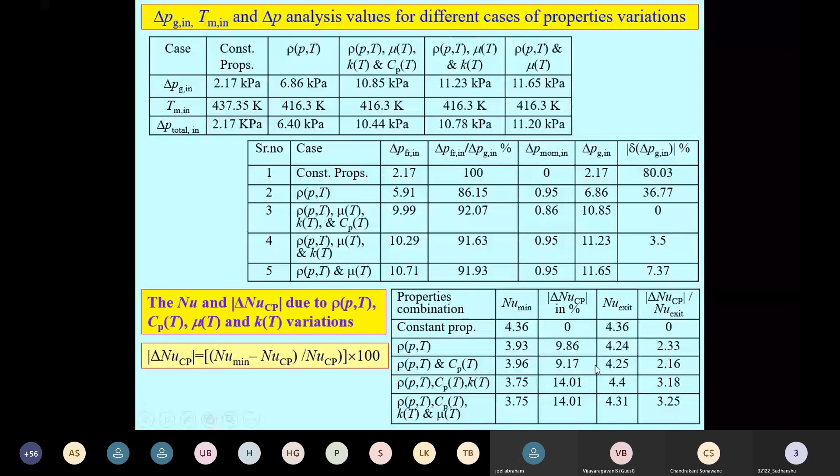So what we discussed in case of air, the similar theory we are applying in liquid flow. Only in the liquid case, the density variation is not so much. It is from 0 to 100, and the density profile for this 0 to 100 temperature variation can be written in this profile. So this variation is written and the profile was given in Fluent. And viscosity variation and conductivity variation for water are totally different compared to air.

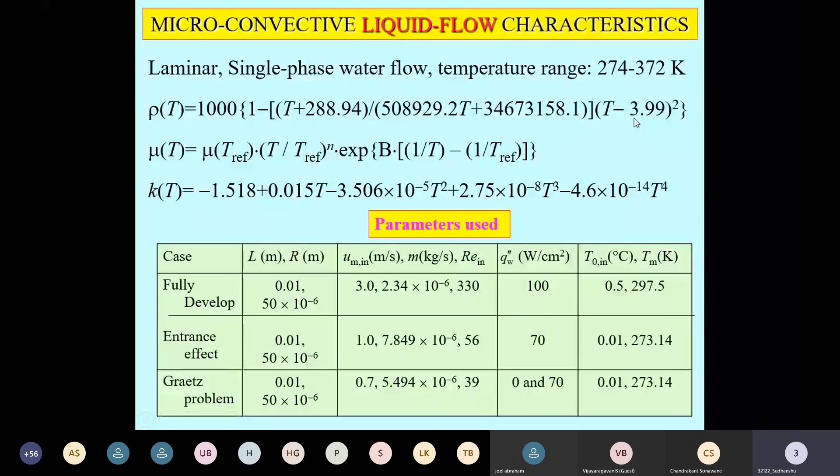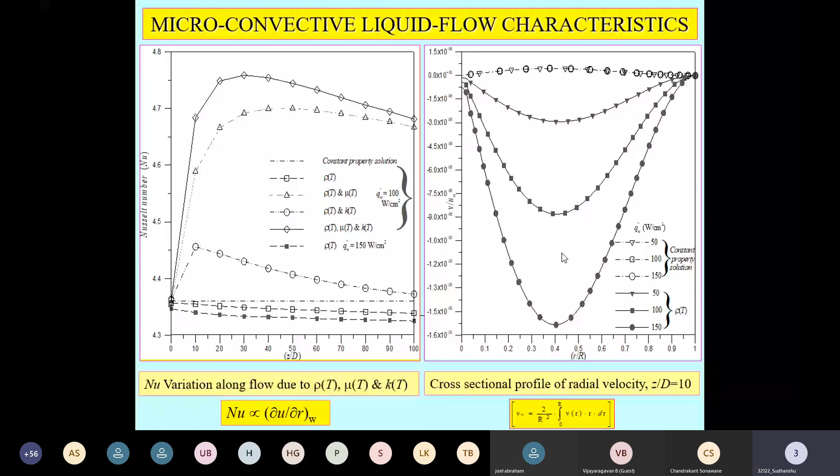And then the most important variation: it was not an outward radial velocity profile, but an inward radial velocity profile, which will sharpen the velocity profile and reduce the Nusselt number. So this theory will be different in case of liquid flow characteristics. I will not go in detail into liquid flow characteristics, because the physical significance and understanding will be altogether different from gas. This study was also carried out by numerical simulation for the friction and pressure drop characteristics, which has totally different types of results.

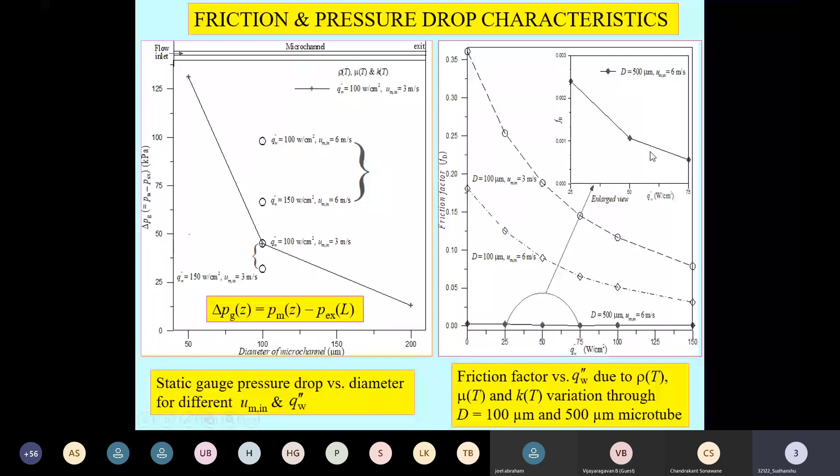And at the last, what I was talking about, the Graetz problem. So the Graetz problem was discussed. The Graetz problem means initially only the velocity profile was given and no heat flux was given, and midway along the length of the channel, a constant heat flux value was given, and from there onwards the temperature profile will try to develop.

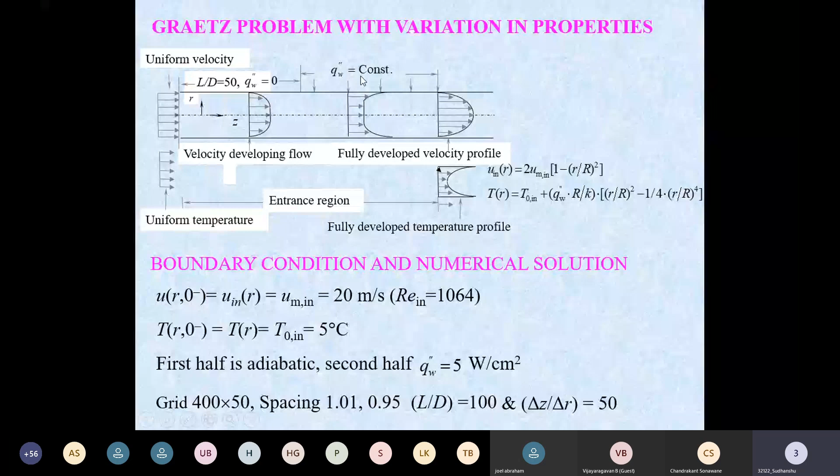And now at the entrance length, both velocity profile and temperature profile will be fully developed, and then we solve the Graetz problem from z by d equals 0 to z by d equals 100, wherein we have two categories. Heat flux is 0 up to L by d 50, and we have a constant wall heat flux boundary condition with some constant value during the other half, wherein the temperature profile will be fully developed. So this is called the Graetz problem. This Graetz problem was also solved, and we have results with the variation of the Nusselt number.

So, in a nutshell, other than the conventional channel, we have two additional physical mechanisms coming out: radial velocity, that is radial convection, and axial conduction. And all this thermophysical property variation has an effect on the velocity field and temperature field. So density has a direct effect which flattens the axial profile, that is significant, and density has a direct effect on the temperature field, which is significant.

Similarly, specific heat has an indirect effect, which is insignificant, and this Cp value has a direct effect which reduces Tw minus Tm because of reducing the temperature gradient at the wall, and which is significant.

Viscosity has a direct effect which sharpens the axial velocity profile, which is significant, and in case of the temperature field, this is considered to be an indirect effect, which is insignificant. And the last is thermal conductivity property variation, which has an indirect effect which flattens the axial velocity profile, which is significant. But in the temperature field, it has a direct effect which flattens the temperature profile, which is a significant effect on the heat transfer characteristics.

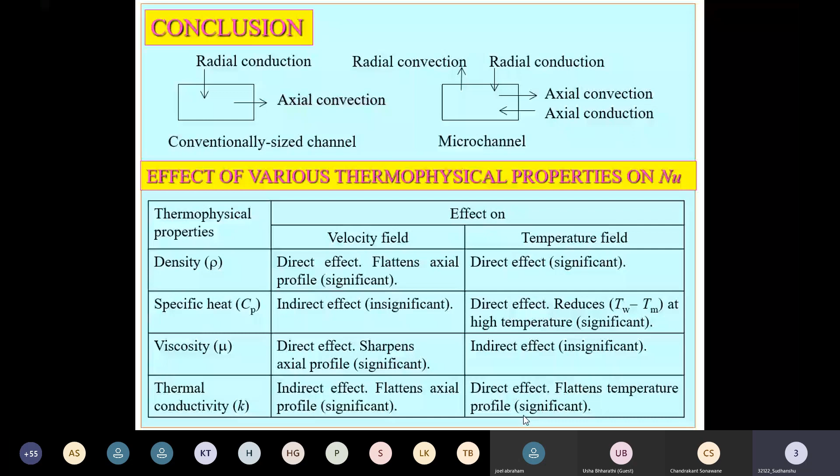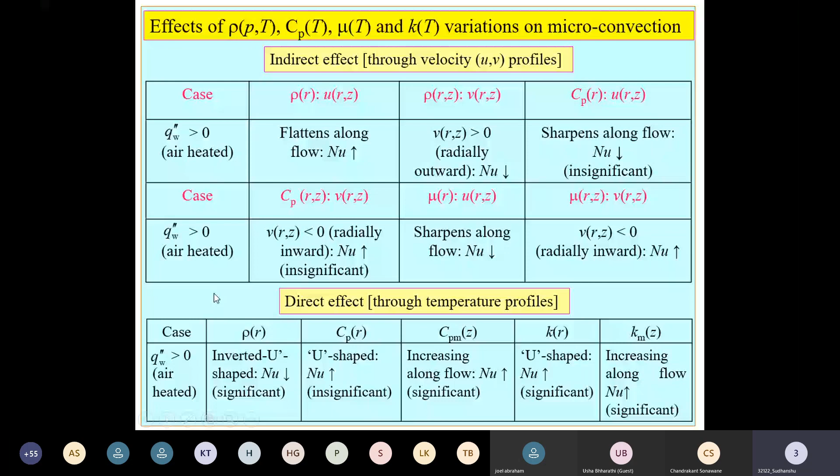So the property which is playing a direct effect will play an indirect effect in the friction factor and pressure drop characteristics, and this is a reverse case. So for both air heated and air cooled, it is explained. I will not go in detail. So this is the velocity gradient at wall, shear stress for different types of variation. So this is a summarized result.

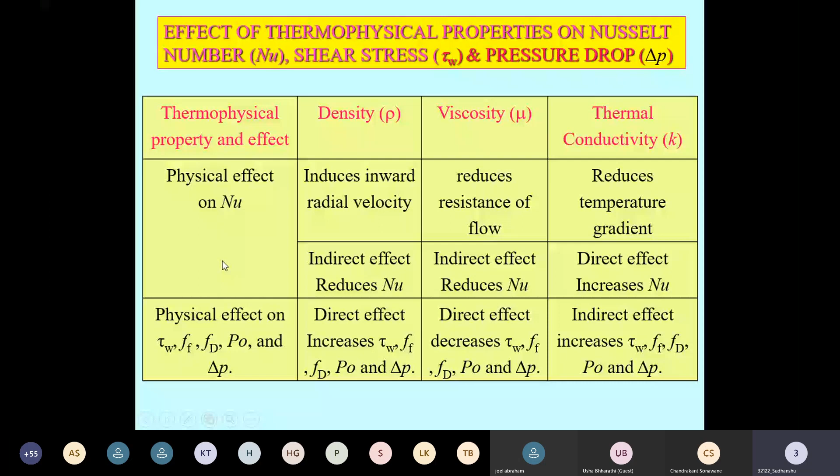So you can see what we discussed in case of heat transfer characteristics. It is the reverse case for the pressure drop and shear stress characteristics, because there it was a direct effect, here it will play as an indirect effect. So with this, I close this discussion on the microfluidics property variation.